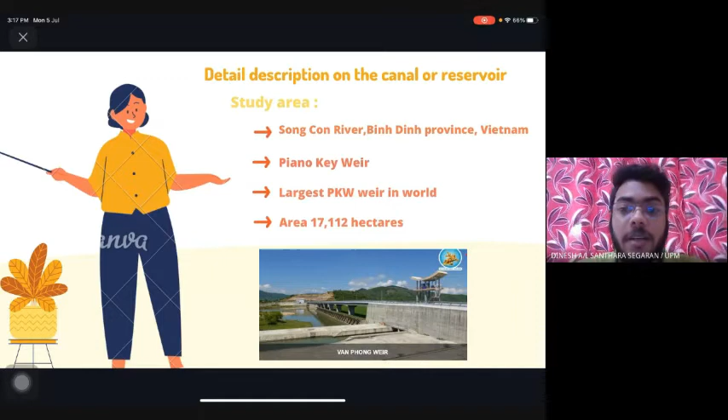The special feature of Van Phong is that it is a spillway designed in the style of PKW, which is piano key weir, a design with a threshold that protrudes before and after the top of the dam, with large flow capacity and capacity to hold it. Van Phong Weir is recognized as the largest piano key weir dam in the world. The area of the catchment is 17,112 hectares for the weir only. Next slide.

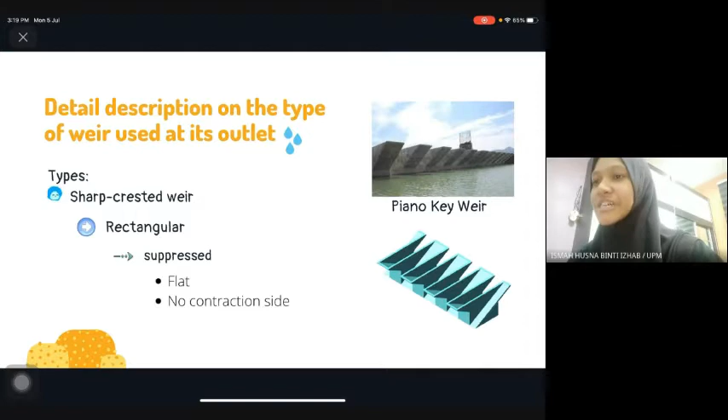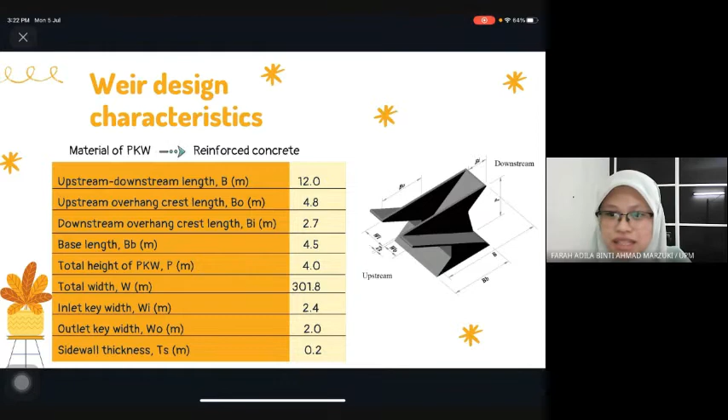The base length of the weir is 4.5 meters. The total height of the weir is 4 meters. The total width of the weir is 301.8 meters. The inlet key width is 2.4 meters. The outlet key width is 2 meters. Lastly, the side wall thickness of the weir is 0.2 meters.

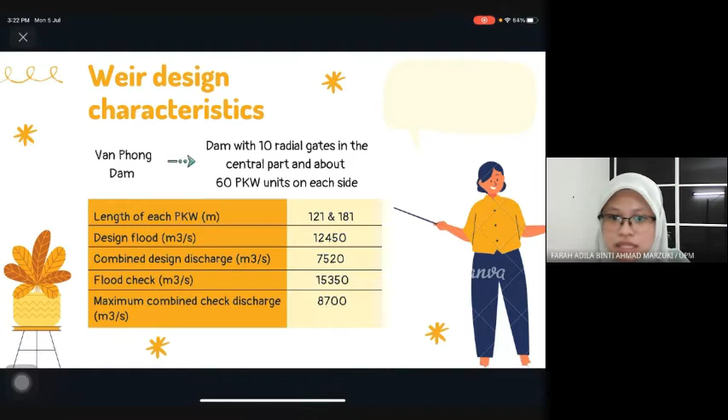Next slide. The Van Phong dam is designed with 10 radial gates in the central part and about 60 PKW units on each side. So the lengths of the piano key weir are 121 meters and 181 meters respectively. The design flood for this weir is 12,450 cubic meters per second, while the combined design discharge is 7,520 cubic meters per second. Check flood events are carried out at 15,350 cubic meters per second, whereas the maximum combined check discharge is 8,700 cubic meters per second. Now I will pass to the next presenter.

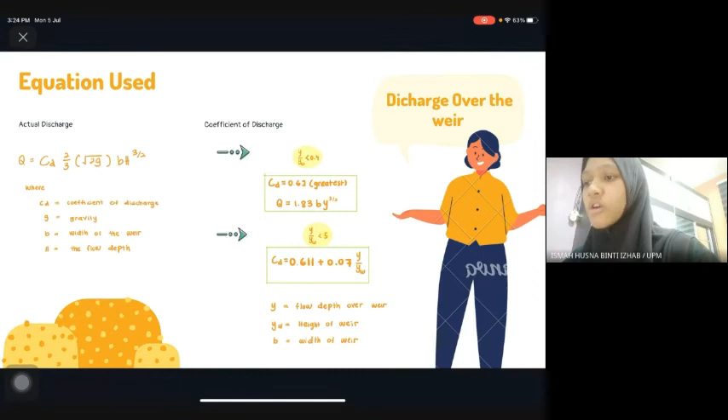Meanwhile, the coefficient of discharge for the weir can be found through these two equations depending on the ratio between the flow depth over the weir and the height of the weir. If the ratio is less than 0.4, Cd will be equal to 0.62, and the simplified actual discharge will be 1.83 times B times H to the power of 3/2. Meanwhile, if the ratio is less than 5, the equation for Cd will equal 0.611 plus 0.07 times flow depth over the weir divided by height of the weir. So I will pass the presentation to Siti Zulaiha.

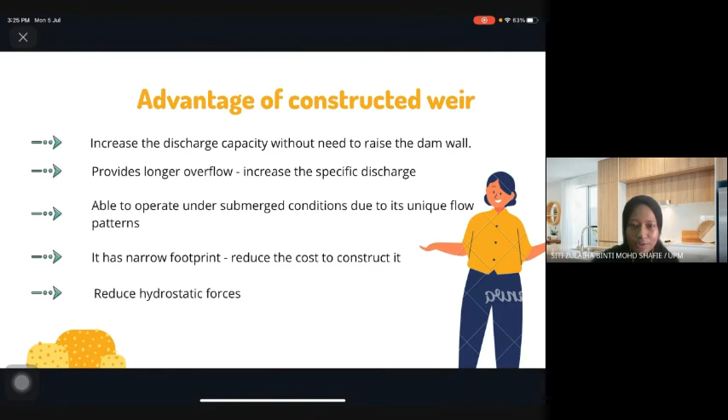Then, the weir helps to reduce the cost of construction. This is because the weir has a narrow footprint, so its volume is not huge. Therefore, the volume of concrete needed to construct the weir can be reduced too. And lastly, the piano key weir helps to reduce hydrostatic force. This also leads to cost savings.

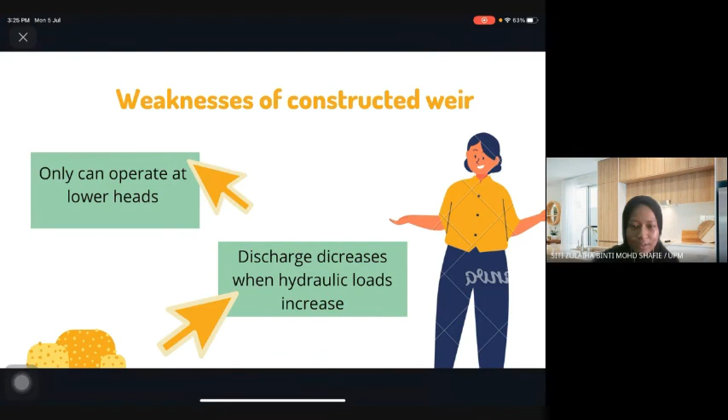Next. So these are the weaknesses of this piano key weir. First, piano key weirs can only operate at lower heads. This is because when the water level increases, the relative benefit reduces asymptotically. And the last one is discharge decreases when the hydraulic loads increase. This is due to local submergence.